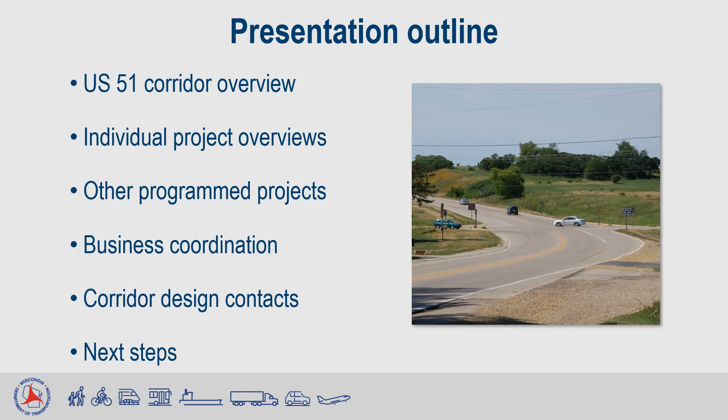The presentation will review the US 51 corridor, individual project overviews, other programmed projects, business coordination, corridor design contacts, and next steps. We are currently transitioning from the study to the design phase. Data gathering has begun if you have seen survey crews or other people on the corridor. With that data, we are able to start working on the design, which will continue over the next few years.

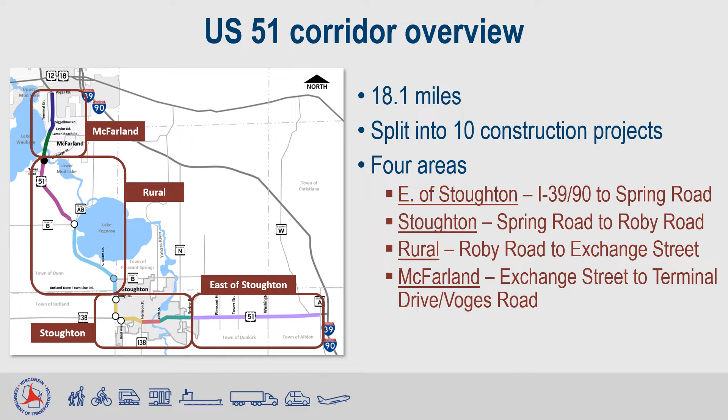The US 51 corridor project in Dane County is 18.1 miles. The project will be split into 10 construction projects. Due to the size of the project, US 51 is divided into 4 general areas. East of Stoughton is one construction project from I-39/90 to Spring Road. The Stoughton area from Spring Road to Roby Road will consist of 3 construction projects. The rural area from Roby Road to Exchange Street will consist of 3 construction projects, and the McFarland area from Exchange Street to Terminal Drive/Voges Road will consist of 3 construction projects.

Throughout the following slides, we will review the improvements for each individual project. We will start on the east end of the project at I-39/90 and end at Voges Road, Terminal Drive in McFarland. The project east of Stoughton will reconstruct the existing 2-lane rural highway, I-39/90 to Spring Road, and add an eastbound passing lane between Washington Road and Tower Drive.

We anticipate this section will be closed to through traffic during construction. Access will remain open for local traffic to residents and businesses, but all through traffic will need to use the signed US 51 detour. This segment of the project is currently scheduled for construction in 2028. However, based on funding, the construction could be as early as 2026. We'll share more information on the project schedules as we continue the design process.

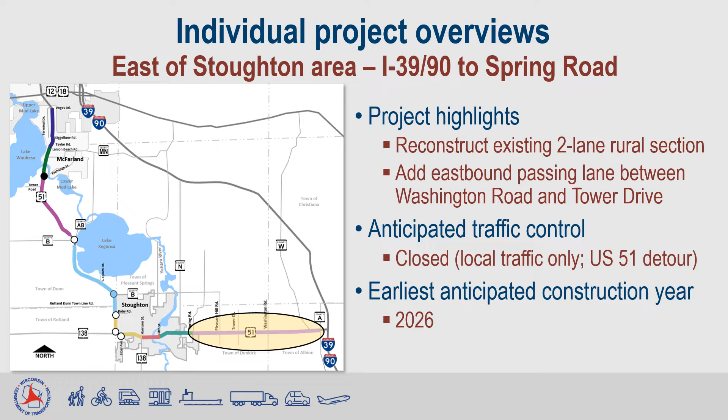The next section is in the city of Stoughton from Spring Road to 5th Street by the Stoughton Fire Department. The project will reconstruct the existing 2-lane urban roadway and improve pedestrian and bicycle accommodations. No decision has been made yet how this section will be constructed. We'll share more information in the future. Construction through this area is currently scheduled for 2025.

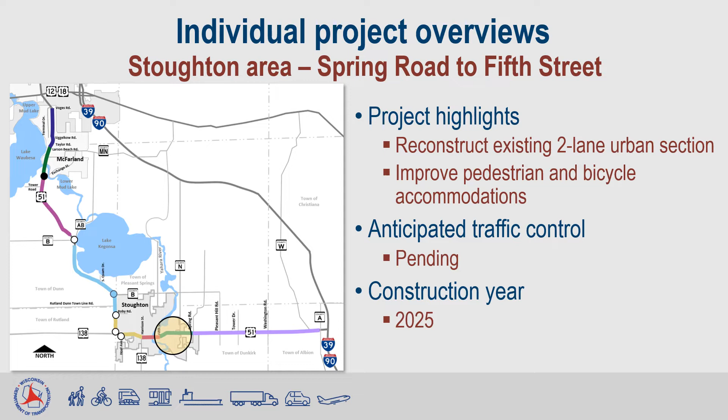The next section is in the city of Stoughton from 5th Street by the Stoughton Fire Department to Harrison Street by the Viking car dealership. The project will reconstruct the existing 2- and 4-lane urban sections, improve pedestrian accommodations, and provide a dedicated northbound left turn lane at 4th Street. Bicycle accommodations will not fit through these historic districts, and WISDOT is working with the city to provide parallel bike accommodations on adjacent roadways. This project is currently scheduled for construction in 2029. However, based on funding, the construction could be as early as 2027.

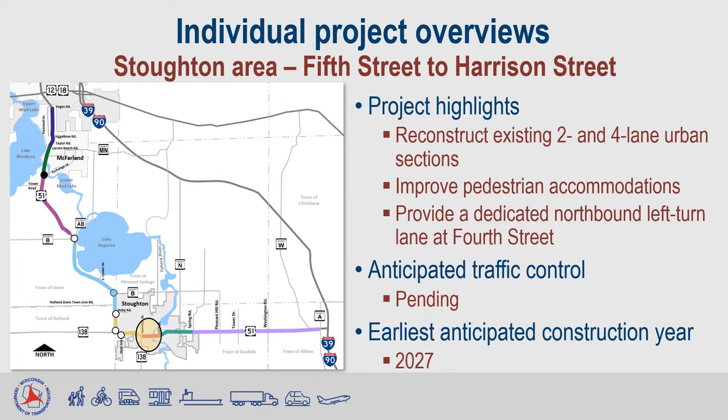The next section is in the city of Stoughton from Harrison Street to Roby Road. From Harrison Street to Hoel Avenue, the project will reconstruct the existing 4-lane urban section. A 10-foot wide sidewalk will be provided on the north side of US 51 from Harrison Street to Hoel Avenue. From Jackson Street to Roby Road, the project will expand the existing 2-lane section to a 4-lane urban section. There will also be a 10-foot wide sidewalk provided on both sides of US 51.

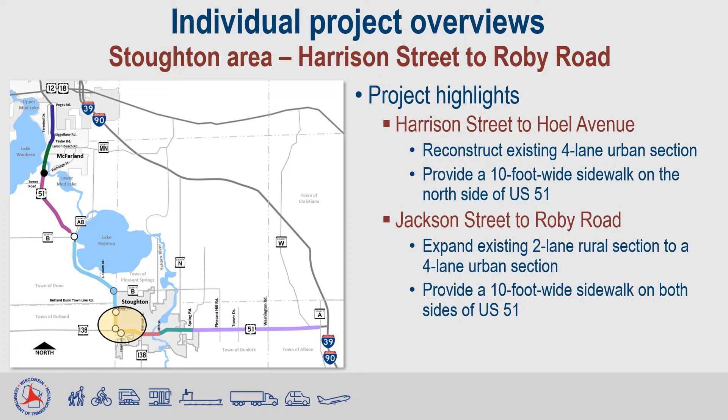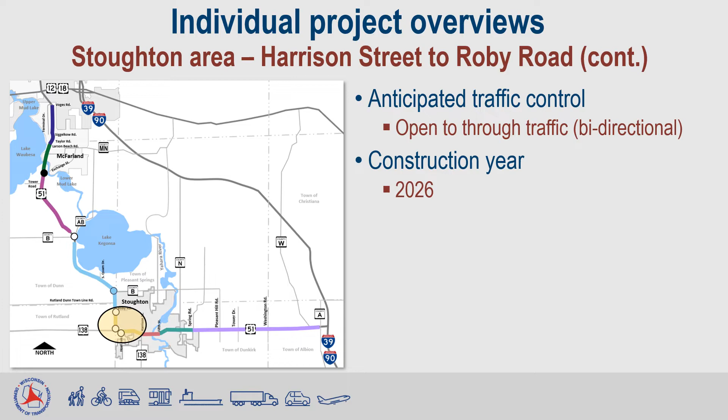Construction for the area of US 51 between Harrison Street to Roby Road is anticipated to be open to through traffic. Some short-term closures of US 51 and/or side roads are anticipated during construction. This project is currently scheduled for construction in 2026.

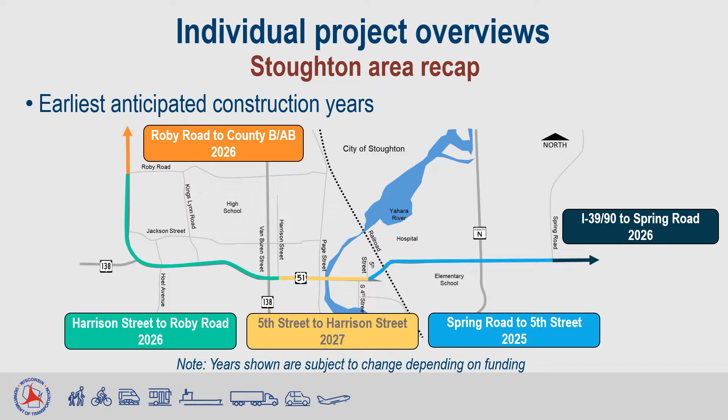The next area is US 51 from Roby Road to County B/AB. This section has three different improvements. The area between Roby Road and County B East will expand the existing 2-lane rural section to a 4-lane urban section. There will also be a 10-foot wide sidewalk on both sides of US 51.

Additionally, the County B East intersection will be converted to a roundabout. The area between County B East and County B/AB will reconstruct the existing 2-lane rural section to add a continuous median and intersection improvements.

Specific intersection improvements will be constructed in the rural area of US 51. We will add right and left turn lanes at all intersections that do not have a proposed roundabout between County B East and Exchange Street.

This graphic shows an example of a 4-legged intersection on the corridor. We will be adding a raised median, shown in green, between the north and southbound lanes, which will continue between every intersection from County B East to Dearson Road.

The location of the medians will allow our dedicated left turn lane, shown in orange, to be offset, which will improve sight distance. There will be a painted median between the left turn lane and the through lane. There will be one through lane in each direction, shown in yellow, and a right turn lane, shown in blue. This allows all turning traffic to get out of the through lanes.

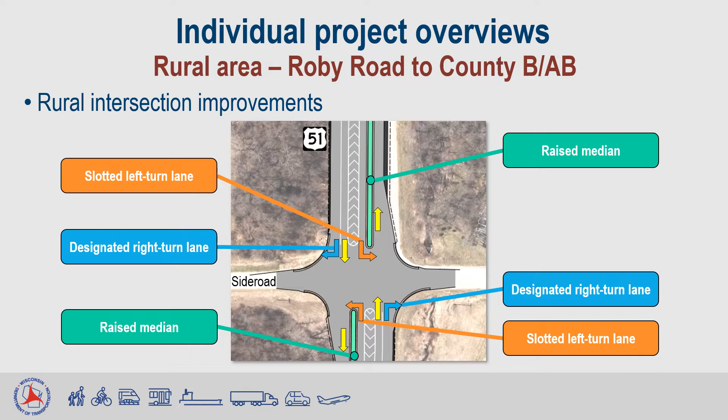Another feature of the intersection improvements is that all left turning vehicles will be able to make a 2-stage crossing. Vehicles stopped on the side road will be able to cross one section of traffic at a time. The first stage would allow the vehicle to stop in the median, and the second stage would allow the vehicle to enter the travel lane.

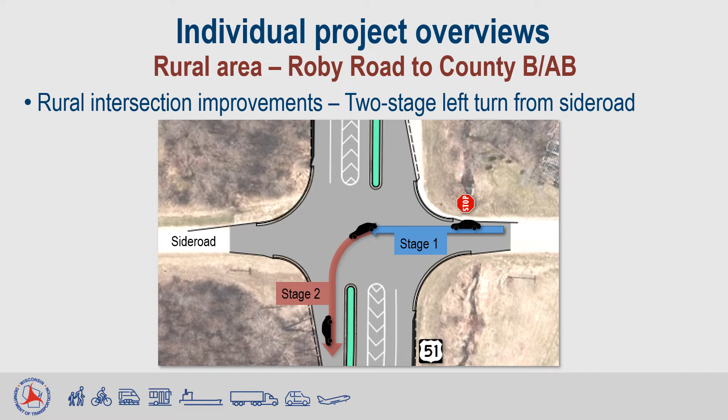US 51 is anticipated to be open to through traffic between Roby Road and South Quam Drive. Some short-term closures of US 51 and side roads are anticipated during construction. Between South Quam Drive and County B/AB, US 51 will be closed during construction.

Local traffic will be able to access the properties on the corridor during construction, but all through traffic will need to use the signed US 51 detour. The project is currently scheduled for construction in 2026 and 2027.

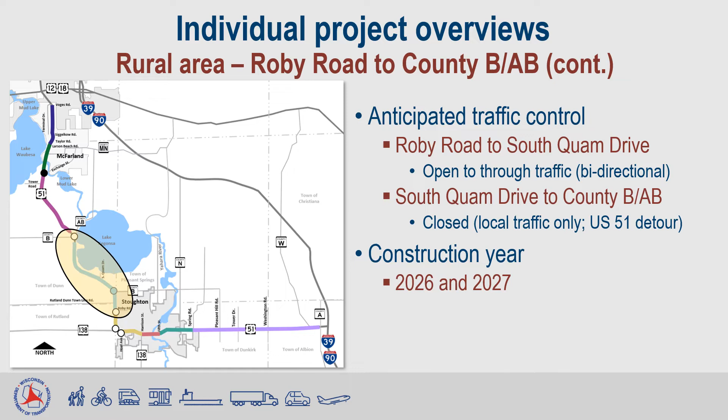Within the segment of US 51 from Roby Road to County B East, we are evaluating the intersection control at Rutland-Dunn Town Line Road. This intersection control evaluation is due to a development being constructed on both sides of US 51 south of Rutland-Dunn Town Line Road.

You can see the preliminary intersection layouts on the slide and also on the exhibits. Currently, there are two options under review: one option is traffic signals, and the other option is a roundabout.

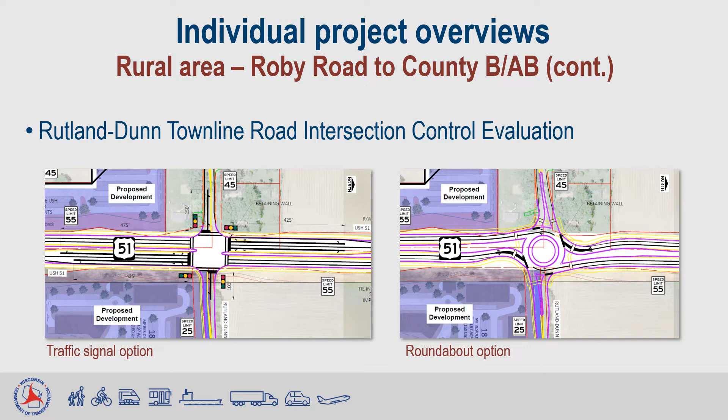Please remember to comment on your preferred intersection control by December 3rd. Your comments will be included in the justification when determining the best alternative for the intersection.

The next area of US 51, between County B/AB and Tower Drive, will reconstruct the 2-lane rural section and include intersection improvements at Dearson Road and Mahoney Road.

Access on the south side of Dearson Road will be removed from US 51, and vehicles will need to use the proposed roundabout at County B/AB.

At Mahoney Road, we will remove the 4 driveways from US 51 north of Mahoney Road and relocate the access points from a new backage road.

US 51 will be closed during construction. Local traffic will be able to access properties on the corridor during construction, but all through traffic will need to use the signed US 51 detour.

This project is currently scheduled for construction in 2027.

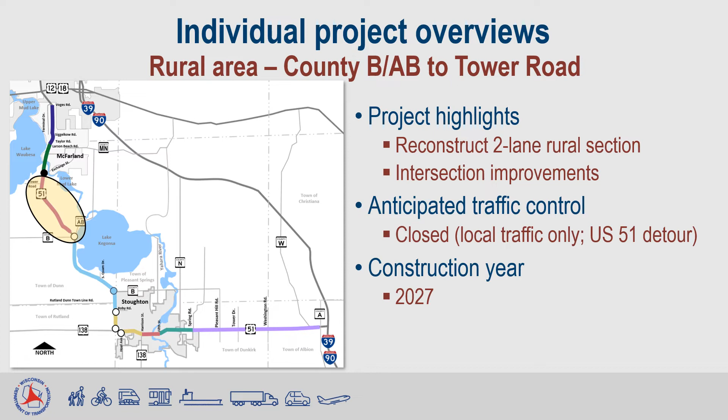The next area is between Tower Drive and Exchange Street. The project will construct a roundabout at Exchange Street, but we are seeking input on the intersection control at Tower Drive. Traffic is anticipated to be open to through traffic.

Some short-term closures of US 51 and/or side roads are anticipated during construction. This project is currently scheduled for construction in 2026.

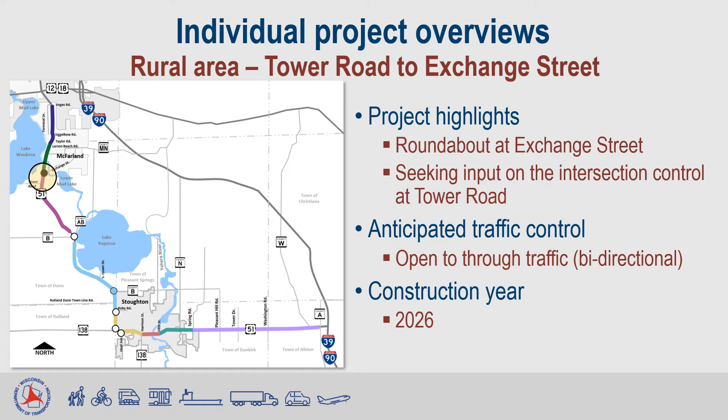One of the intersections that we are seeking input on is Tower Drive. The study proposed Alternative 1, a realignment of Tower Drive to the Exchange Street roundabout, as seen on the slide and exhibits. All traffic from Tower Drive and Apple Blossom Lane on the west side of US 51 would be rerouted to the Exchange Street roundabout.

A new alternative under review, Alternative 2, is to construct turn lanes at Tower Drive. This intersection control would be the same as other rural intersections on the corridor. Access between Tower Drive and Exchange Street and some driveways south of Tower Drive would be right-in, right-out only with this alternative.

The second new alternative, Alternative 3, is to build a roundabout at both Tower Drive and Exchange Street. A 4-lane roadway would be provided between the intersections, and the speed limit would be lowered to 40 miles per hour. Please remember to submit your comments on your preferred intersection control in this area by December 3rd.

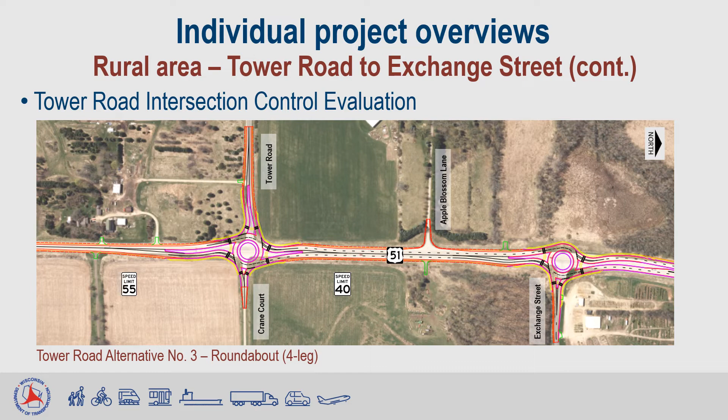As a recap for the rural section of US 51, the earliest construction years anticipated in this area are 2026 and 2027. The project south of South Quam Drive and north of Tower Drive would be completed under traffic. To minimize significant traffic impacts, there is a proposed one-year detour of US 51 from South Quam Drive to Tower Drive in 2027.

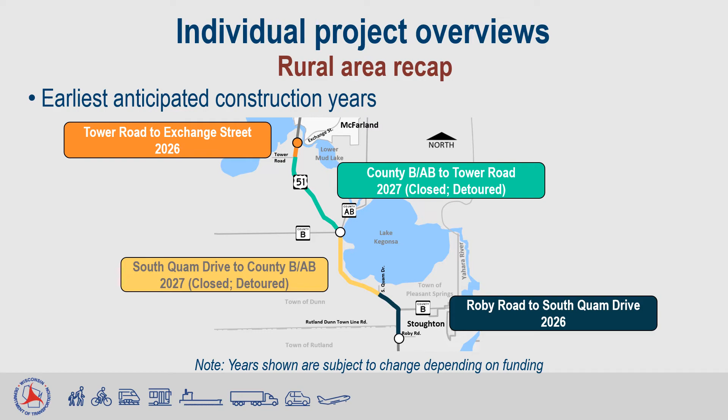The next section is the McFarland area between Exchange Street and Larson Beach Road. The project will reconstruct the existing 4-lane urban section. There will be intersection and pedestrian improvements along this stretch, including a sidewalk being added to both sides of US 51. The project will also replace and lengthen the Yahara River Bridge to match the existing dam opening.

Traffic is anticipated to be open to through traffic. Some short-term closures of US 51 and/or side roads are anticipated during construction. This project is currently scheduled for construction in 2028. However, based on funding, the construction could be as early as 2026.

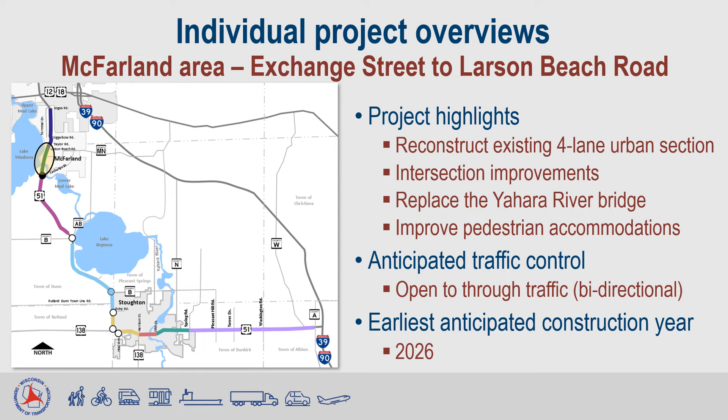The last section is between Larson Beach Road and Terminal Drive/Voges Road. The project will replace the existing concrete pavement, reconstruct the southbound bridge over Taylor Road, and add an auxiliary lane north of Siggelkow Road on both sides of US 51.

Traffic is anticipated to remain open to through traffic. Some short-term closures of US 51 and/or side roads could occur during construction. This project is currently scheduled for construction in 2024 and 2025. Construction in the fall of 2024 will include traffic control, such as crossover construction. The majority of US 51 construction in this area is scheduled to be completed in 2025.

The US 51 corridor project will not reconstruct the Terminal Drive/Voges Road intersection. Improvements to the US 51 and Voges Road intersection are planned to be investigated as part of the US 51 Stoughton Road study, as the intersection is less than a half mile from the Beltline.

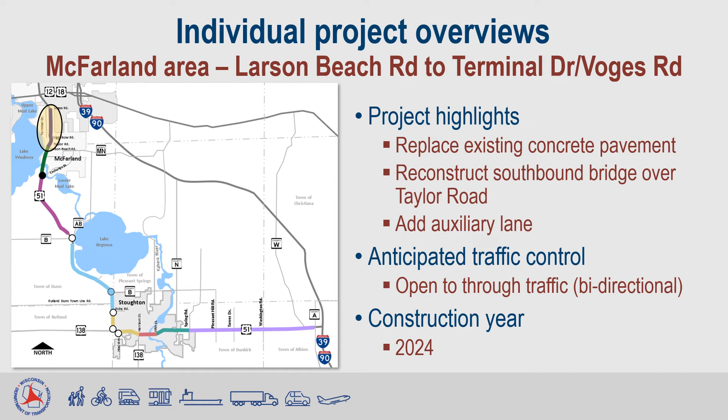Two alternatives are being investigated for the US 51 and Siggelkow Road interchange. Both alternatives provide bicycle and pedestrian accommodations on both sides of Siggelkow Road, as well as a dedicated right turn lane for vehicles traveling westbound along Siggelkow Road heading north towards Madison.

The traffic signal alternative provides traffic signals at both of the interchange ramps. A single through lane is provided in each direction along Siggelkow Road, along with left turn lanes between the intersections under the US 51 bridges.

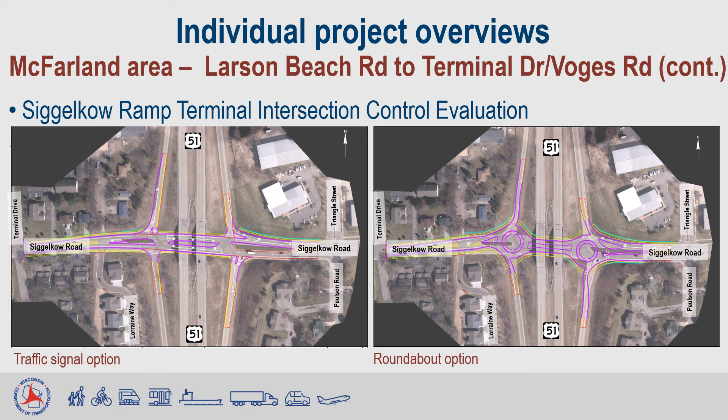The roundabout alternative provides a single lane roundabouts at both the interchange ramps. A single through lane is provided in each direction along Siggelkow Road. Please share your input on the alternative.

There are a few other program projects on the US 51 corridor in Stoughton. In 2022, 3 roundabouts will be constructed at Roby Road, Wisconsin 138 West, and Hull Avenue, Silverado Drive. In 2024, a roundabout will be constructed at the US 51 and County B/AB intersection.

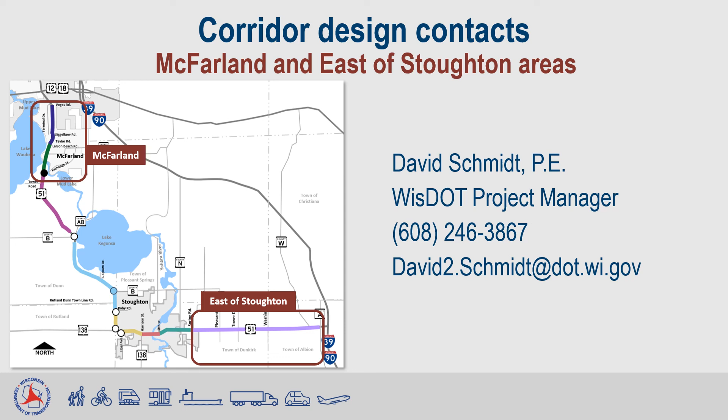As we enter the design phase, there are new WisDOT project managers overseeing the project. If your comments relate to the overall project corridor, the area east of Stoughton, or Exchange Street north through the village of McFarland to Terminal Drive/Voges Road, please contact David Schmidt at the contact information shown on the screen. If you have any comments or questions in the City of Stoughton or the rural section between Stoughton and McFarland, please contact Kevin Junaski at the contact information shown on the screen.

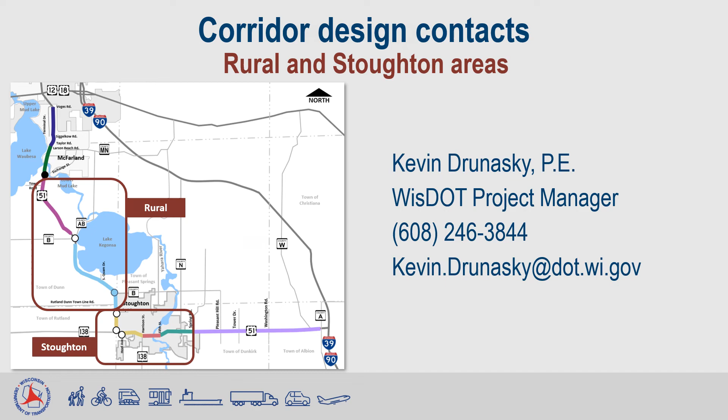We are seeking any general project feedback, including any comments on the intersection control mentioned during the presentation. Intersection control is being reevaluated at Rutland Dunn Town Line Road, Tower Drive, and the Siggelkow Road interchange ramps. Please submit your feedback by December 3rd, 2021.

Our next steps are to continue the corridor preliminary and final designs. During the design process, we will have public involvement meetings and outreach for each project.